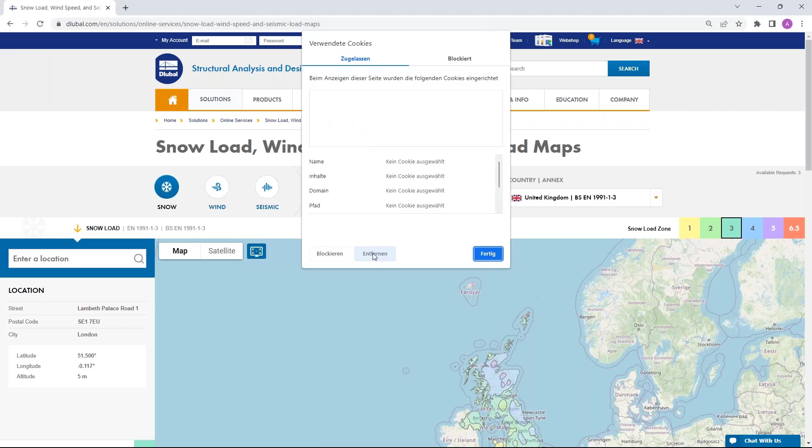Then I start with the first question: the GeoZone tool is not loading, what can I do? Some users of our GeoZone tool had problems with the display of the load maps. You can find under solutions the snow load, wind speed, and seismic load maps. It works for me, but if you have problems, you can click, for example in Google Chrome, on that lock icon left above. Click on cookies and delete all cookies. It can be that you have outdated cookies or unnecessary cookies activated. If you refresh the page, this dialog appears, and you need to allow the cookies, at least the necessary cookies. If you do that, everything should be fine again. That was the first question.

Then we turn to the program and the second question. Can I specify in the combination wizard that load cases from different action categories are mutually exclusive? A relationship between load cases describes rules according to which certain load cases must be considered in the load combination. This way you can define load cases that either always occur together or are mutually exclusive.

In this example, I've got different load cases: self-weight, snow, wind, and a man load. To introduce you to that function, I would like to not combine load case number 3 and load case number 4 - if there is full wind, nobody should be on the roof. How to do that? I open with a right click in the navigator data the load cases and combinations.

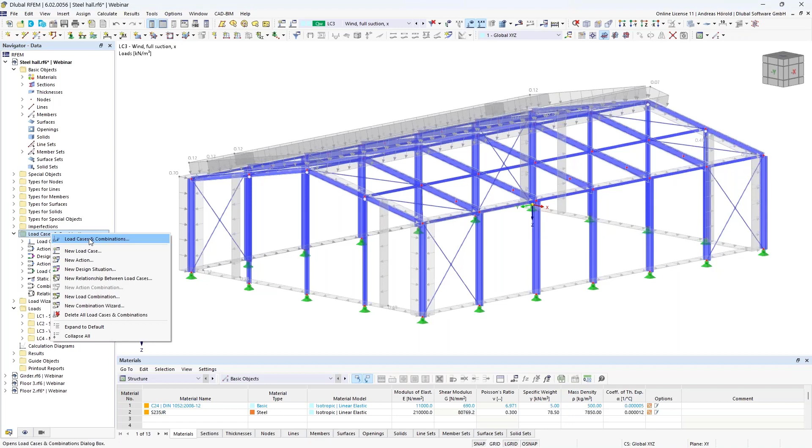At the moment, the combination wizard is activated, and I have 13 load combinations. You can see load case 3 and load case 4 are combined in the load combinations. When I turn to design situations, you can check here: consider inclusive, exclusive load cases. You can create a new relationship: inclusive load cases and exclusive load cases.

That's the dialog for the inclusive load cases. If you click on it, the edit button appears and you can select different load cases. Here you can combine or select load cases that combine only with those load cases, for example the other load case. I think that makes no sense.

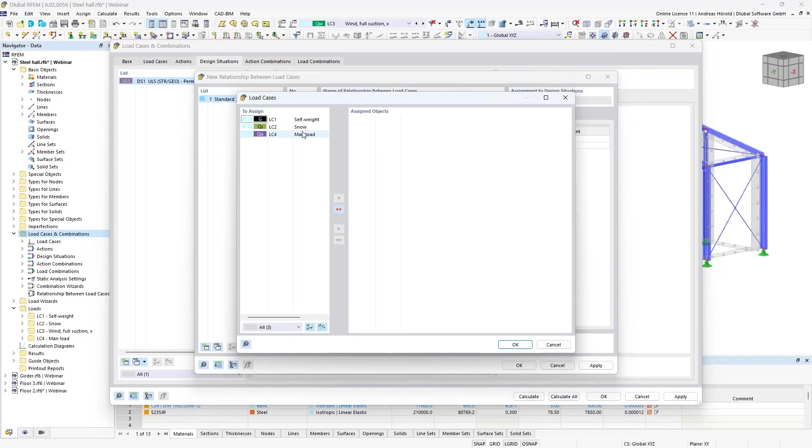We'll use an example that makes sense with exclusive load cases - that's the opposite function of inclusive load cases. You can select here or go in the table and click on the edit button. You can select the wind load case, and we don't want to combine the man load case with wind. Okay, we can apply that.

Let's take a look at the load combinations now. We have only 8 combinations, and load case 3 and load case 4 are not combined anymore.

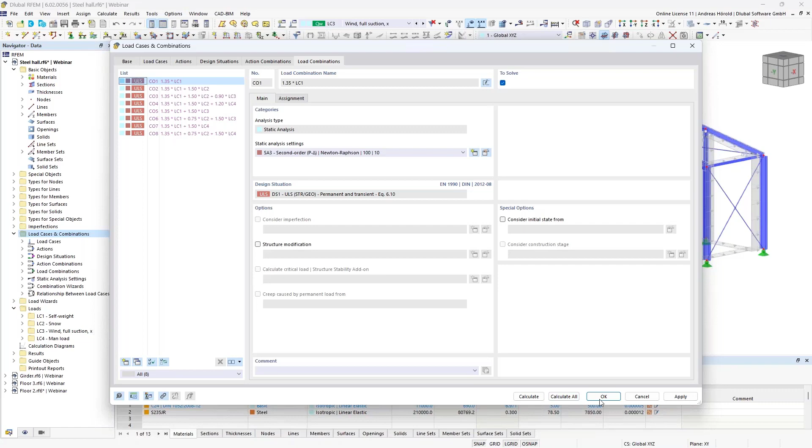Okay, I can leave the dialog and close that model. And we turn to the next question.

That's the right example. The question is: I'm trying to design a laterally supported member, but unfortunately the results I get are completely implausible. What could be the cause of this?

Imagine we want to define lateral supports in the third points here. That's a 15-meter long beam, and after 5 meters and after 10 meters, in the third points, we would like to define such supports.

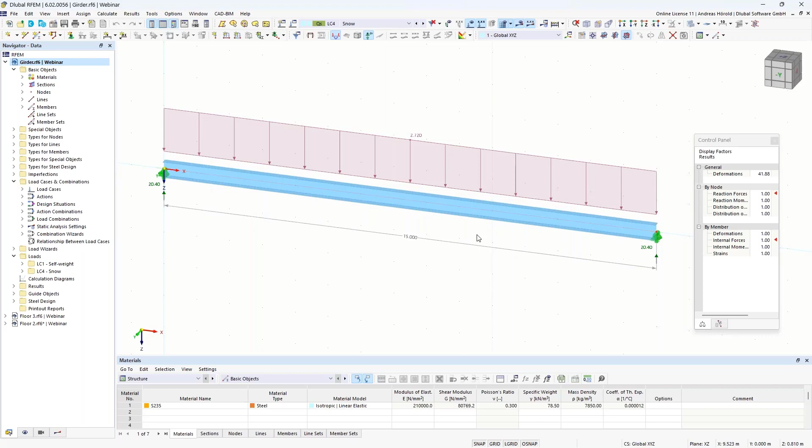How to do that? I double click on the beam. Then the design properties are checked here for the steel design. I turn to the design types, and in the dialog for effective lengths, I create new effective lengths.

Under nodal supports and effective lengths, I can activate intermediate nodes and insert rows. I insert 2 rows and define fixed in Y direction, in the direction of the weak axis.

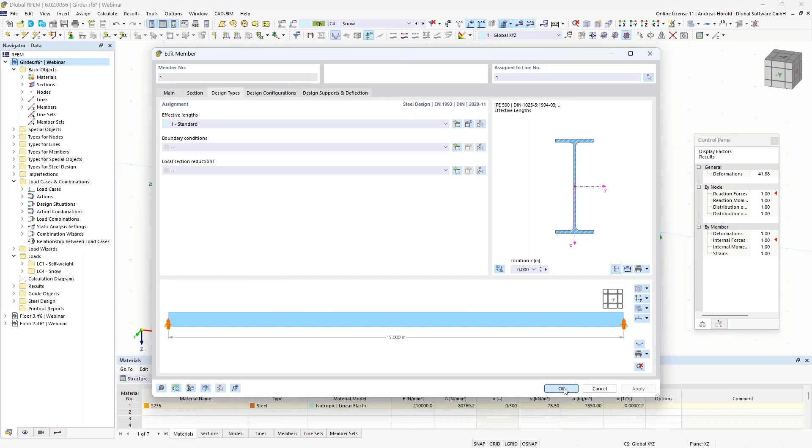Let's run the steel design. As you can see, it's overloaded, and you can see on the mode shape that the girder isn't supported in the third points.

It's not really a mistake, but the program needs nodes in the third points. If I click on it again and go to the design types, maybe you saw it already: there are no node numbers here, and that's the reason why it doesn't work.

So let's define these nodes. I select the beam, or right click on the beam, then under members I find the function divide members.

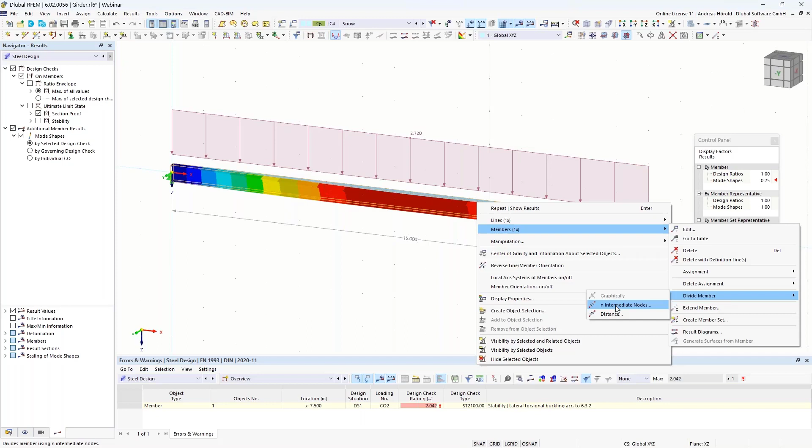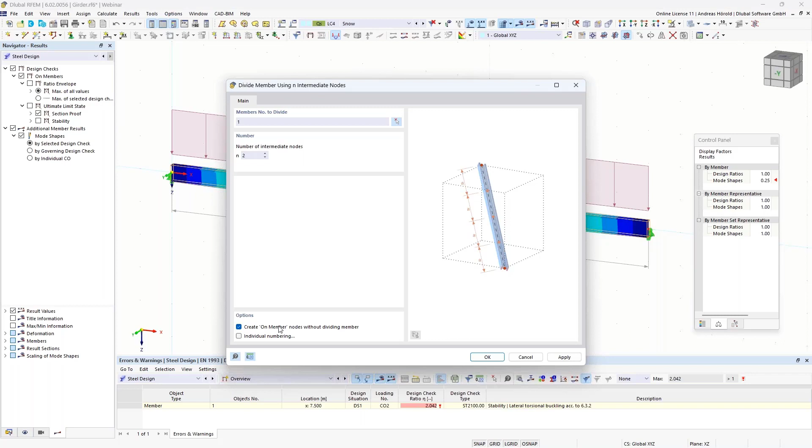I click on n intermediate nodes, define 2 intermediate nodes, and check the option create on member nodes without dividing member. I could also uncheck this, then the member would be divided, but then you'd have to create a set of members. I'd like to avoid that, but it would also be possible.

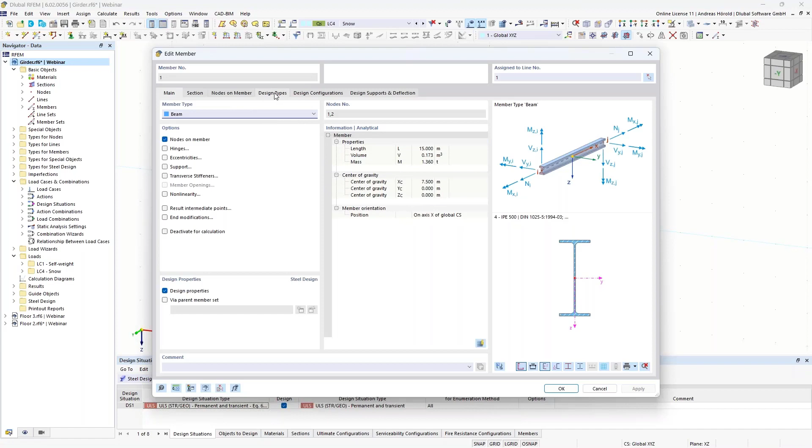Okay, so two nodes are created in the third points, and the member isn't divided. I double click on it, go again to the design types, and use the edit button.

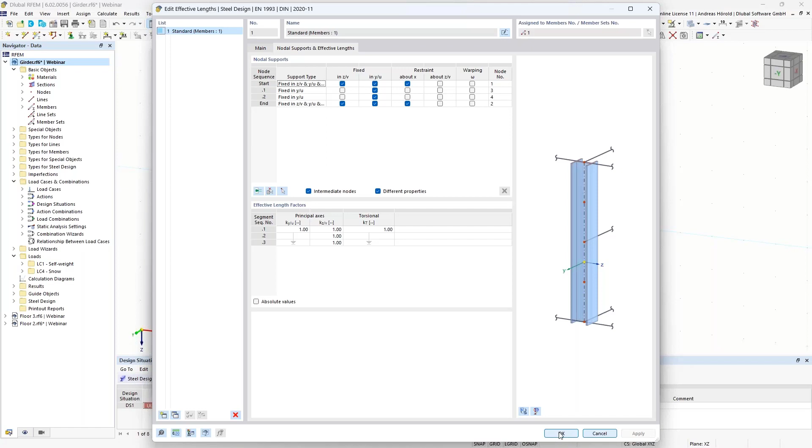Then you can see the program detects the nodes automatically and assigns the fixed function in Y direction to the nodes. And in the preview graphic, you can see the lateral supports.

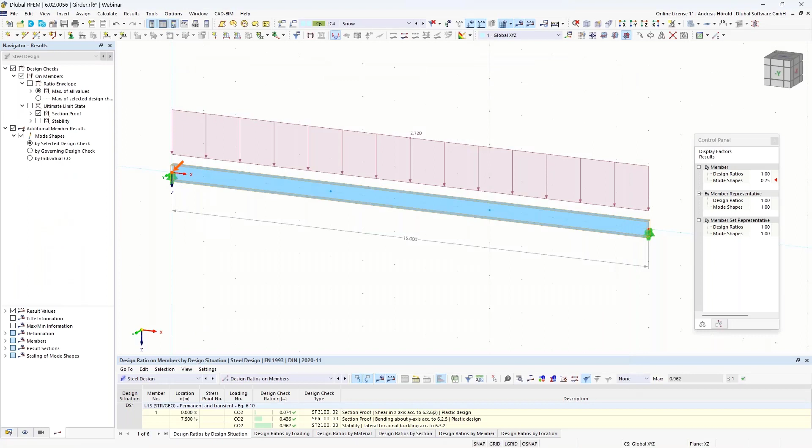Let's run the steel design again. So now you can see the ratios are under 1.

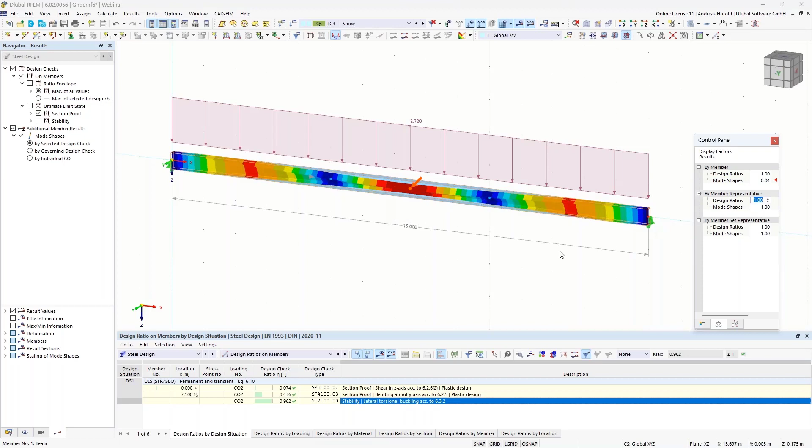And if I click on stability design, you can see the mode shape. I edit the factor, and then you can see that it is supported in the third points: a completely different mode shape and a different stability design.

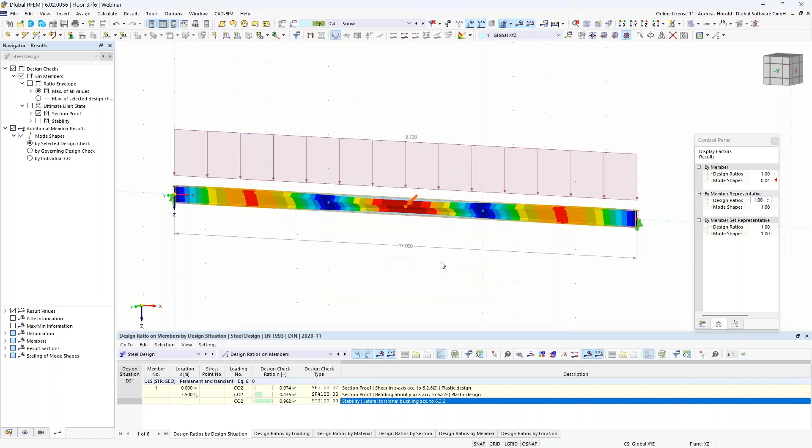Okay, then we turn to the next models. The question is from last month: can I transfer the support forces from one model to another model as loads?

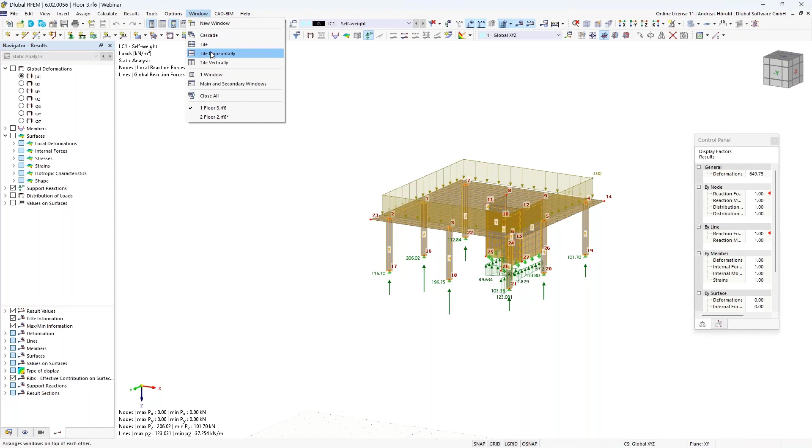Let me prepare the window. I tile it horizontally. I've created two models: the model floor 3, and under floor 3 is floor 2, another model.

You could design it in one model, but sometimes it's necessary or you'd like to design in different models. It's now possible to transfer or apply the support reaction from that model as a load on this model. I'll explain it using two examples.

You can see here a support reaction of 206 kilonewton, and here a nodal load of 206. Here 101, and this nodal load is missing on node number 17. We have 116 kilonewton as support reaction there, and we would like to apply that at that node.

How to do that? I create a new load, a new nodal load, left above. Then I check 'from support reaction'. A new dialog is available now.

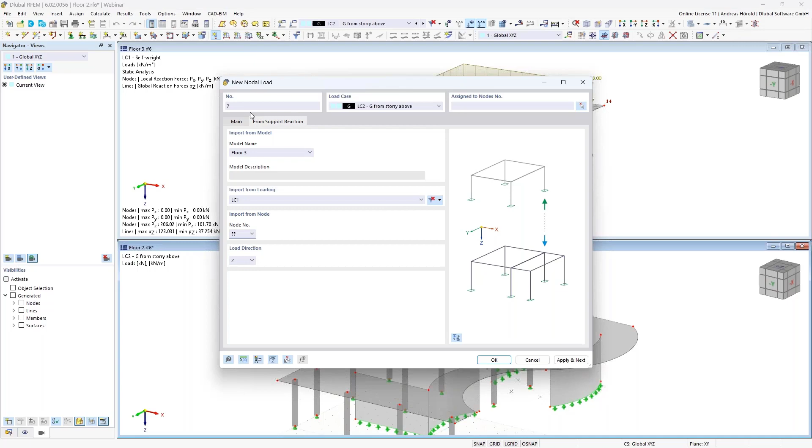So, floor 3, that load case, node number. That's why I displayed the nodal numbers. We have to select nodal number 17.

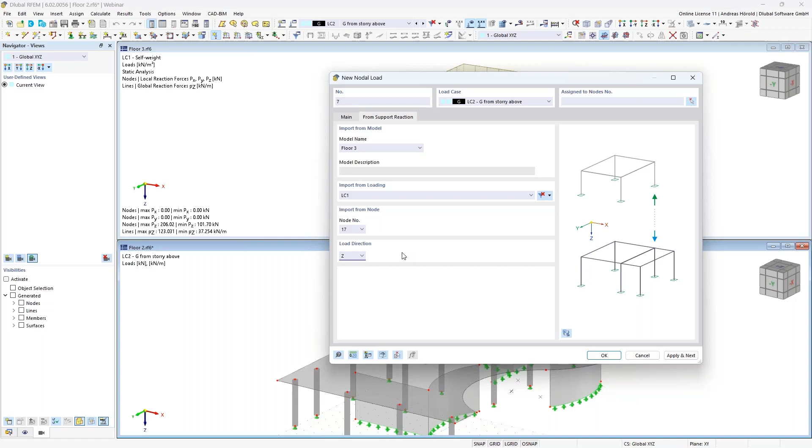And the load should be in Z direction. Also, transfer of horizontal load is possible, as you can see. So, I select the node.

And why are there still question marks visible? Because we have to calculate the model. But before we do that, I would like to assign a line load.

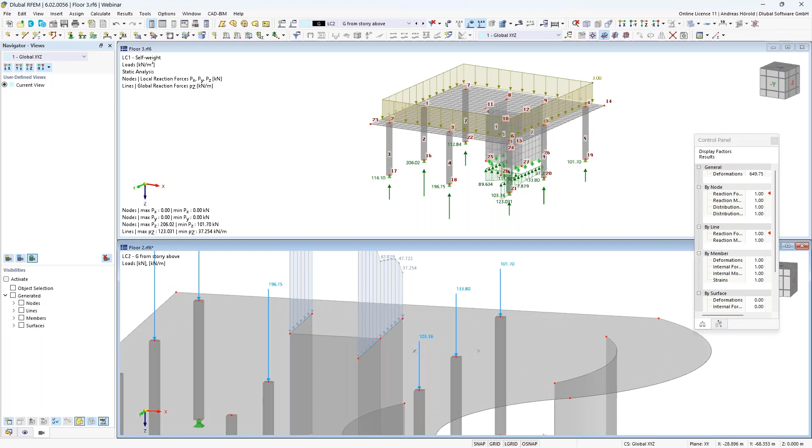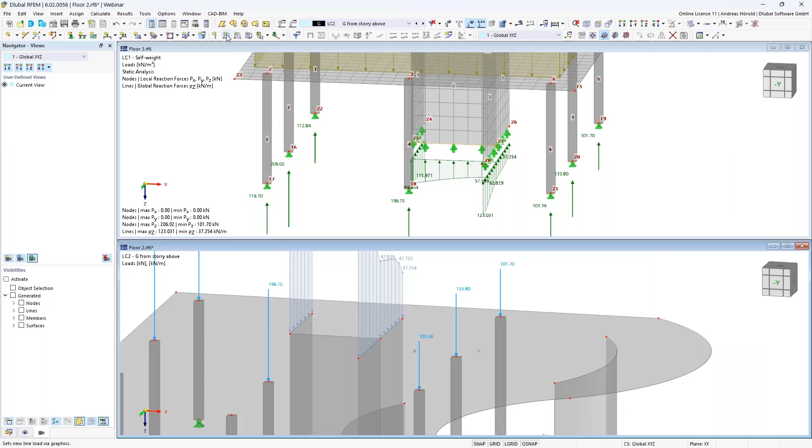So on that line, I can rotate this model here. This support reaction from line number 22 should act as a line load on line number 2. So we create a new line load.

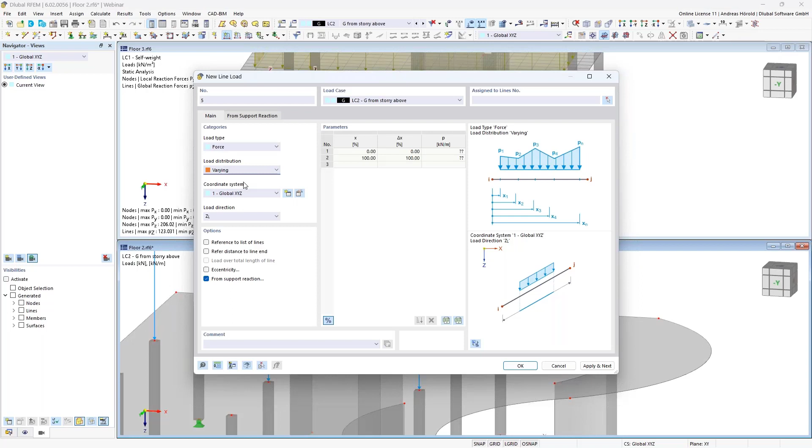We activate the function for support reaction. I can choose a load distribution with varying or uniform. I leave it varying. Then in the dialog for support reaction, I have to choose the model Floor 3, load case number 1, line number 22, and the load should act in the Z direction.

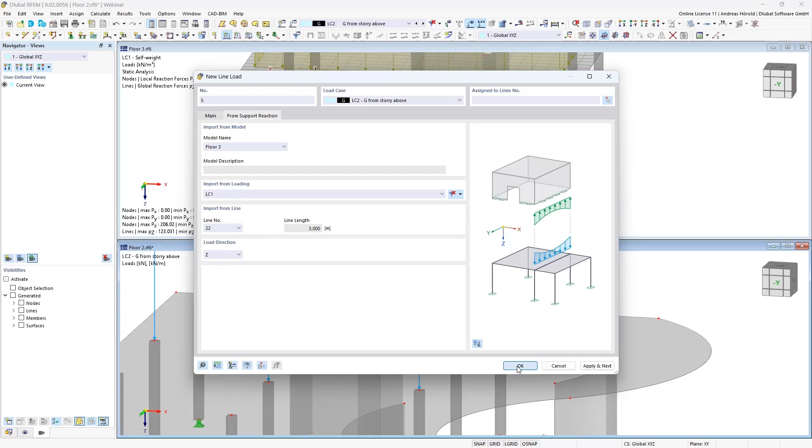I have to select the line. That's all. And now we have to calculate all.

This is the first expansion stage of the function, and it has been released with the current version. So as you can see...

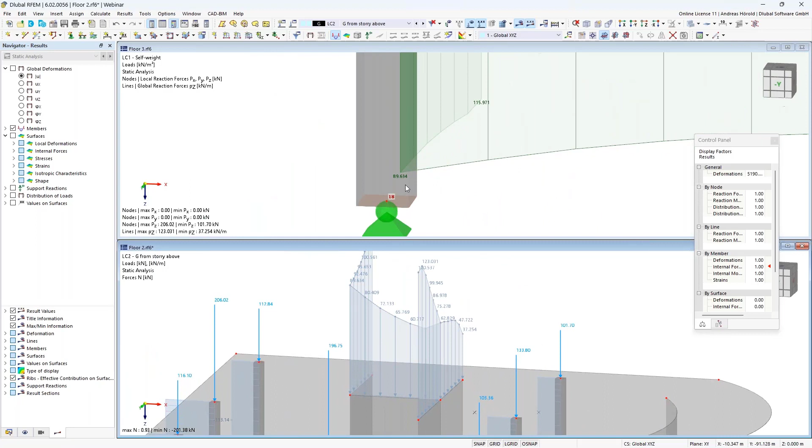Here are 89 kilonewton per meter, and here also 89 kilonewton per meter as load. Then the nodal support reaction was 116 and 116 here at that node. Okay, that should be all.

Do I forget to mention anything? As I mentioned, the feature is in the first stage, and there will be another variant soon in which several elements and several load cases can be linked together at the same time.

Just try it, also with the downloaded models - you can download the models from our website. I will show at the end of the webinar where you can find them.

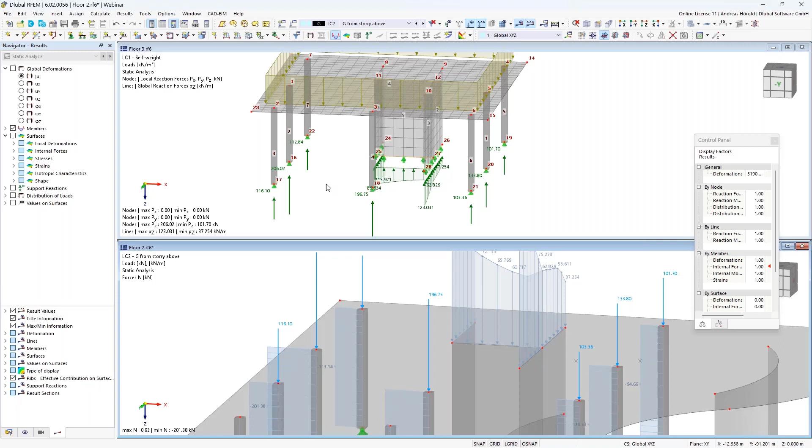The most important thing is that the two models, or more models, are in the same Dlubal Center folder. Then as a first step, you should use the Save As function, and then all should be linked.

Okay, then I close that model and turn to the next question: is there a way to assign custom keyboard shortcuts to certain commands, such as copy to clipboard and so on?

With RFEM 6 and RSTAB 9, you can assign hotkeys to a variety of commands. This way, frequently used commands can be executed easily and quickly with a previously assigned key combination. You can also do that for the mouse - if it has buttons besides the left, right, and middle buttons, you can assign a shortcut to these other keys.

I would like to show the shortcut for the keyboard. You can do a right click on the toolbar, then you can see the Customize Menus and Toolbars function, or under Options you can also find this function.

If you open it, there are already shortcuts defined, and I would like to show it with an example. We would like to create a shortcut for Print Graphics to PDF. I double click on it, and then press Ctrl and D, then Set.

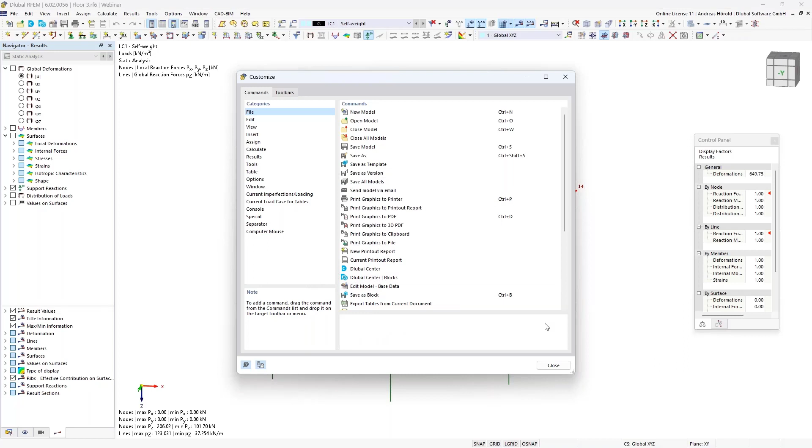And I leave the dialog. If I click Ctrl and D, then the PDF print should open. And if I click OK, then I can print the graphic.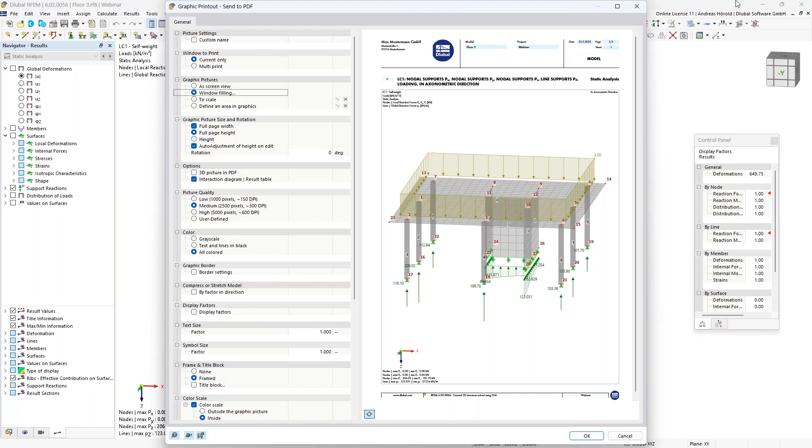Then we turn to the next question. I have to open another model. The question is: are the manufacturer databases for CLT also included in the multi-layer surface add-on?

I would like to show that on a model from a previous webinar. Under Thicknesses, layers are defined. Let me create a new thickness to show you the library.

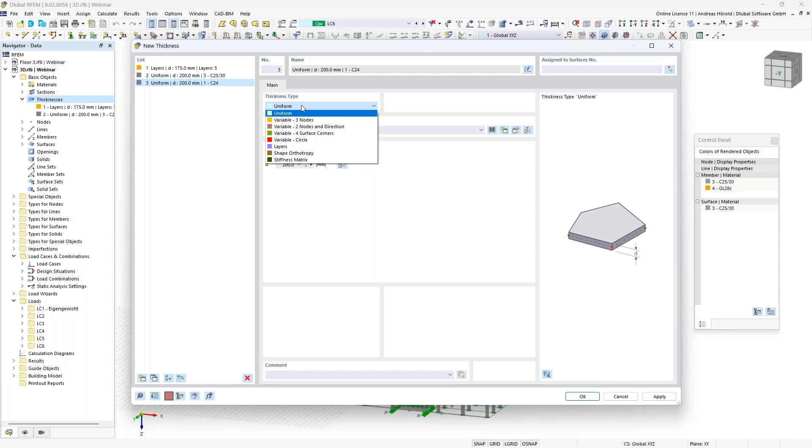So I have to define a material and then - no, that's not right - I have to define or assign a thickness type, layers. That's better. Then I click on layers, and you can find the library here, the book button.

Click on it and you can see all the manufacturers here: Binderholz, KLH, and so on. Now I can select any layer combination here, and it will be imported.

That's all to that question. We extend this library from time to time, continuously.

I think this week another manufacturer will be integrated.

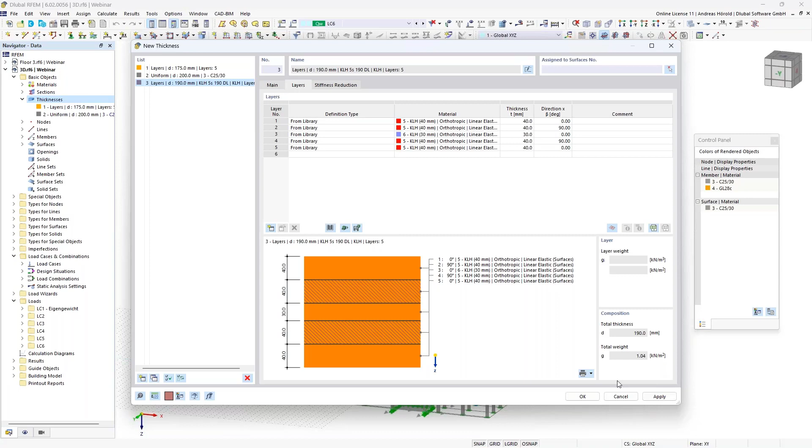Okay, then we turn to the last question for today: can I import models from Revit 2023?

Yes, the interface to Revit 2023 has recently been released. To use the interface in Revit, the add-on for export or import must first be installed.

I can show you where to find it in your Explorer, under Windows, Program Files, Dlubal, RFEM, the current version 6.02, Tools, and Revit Add-in. You can find the setup exe, double click on it, and install the interface tool.

I prepared that model to show you some things. If you have installed the interface, there is the RFEM6 Work in Progress dialog here. Then you can find the Export Import button, Dlubal Parameters, and the conversion tables.

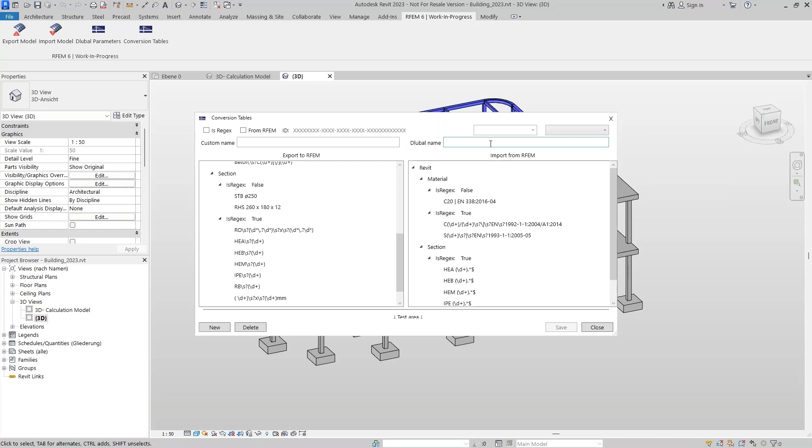There are predefined conversion tables for the materials and the cross sections, but you can create new definitions. You have to enter the name in Revit for the cross section or for the material here, and the name in RFEM here.

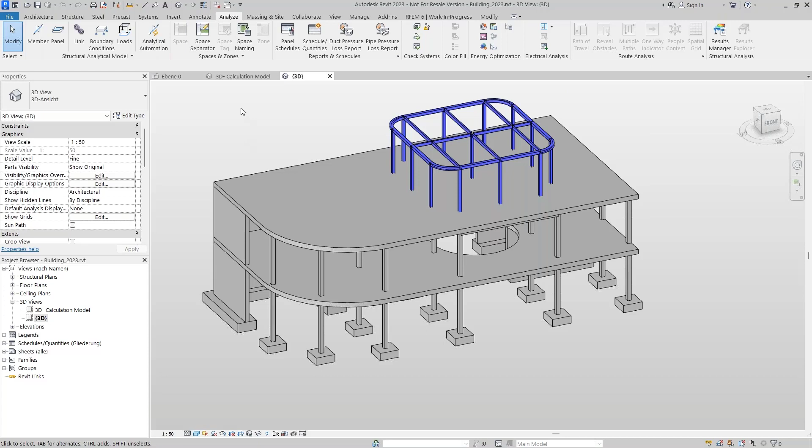Before the export, we recommend creating an analytical model from the physical model. That's the physical model. If you click on Analyze and Analytical Automation, a calculation model is created, with the definition of the material, the member definition, and so on. Maybe you have to modify something on that calculation model, but that depends on the model in Revit.

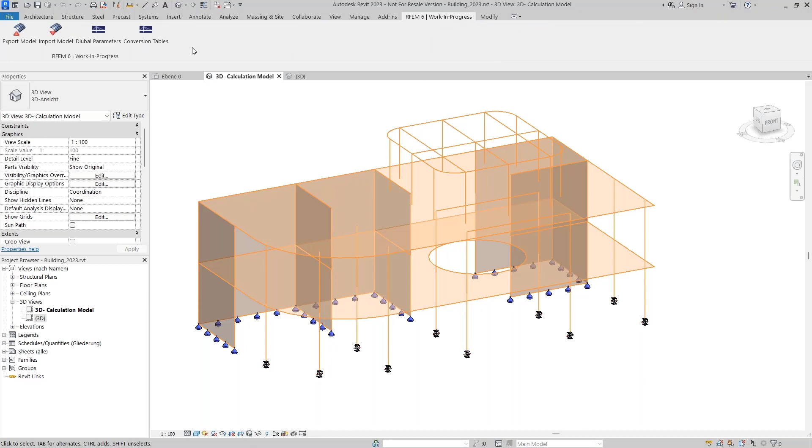So once all parameters are present, nothing stands in the way of performing an export. We have to click on the export model, and you can see you have different options.

That's a similar dialog as in RFEM5. You can define the Z direction, upwards, downwards, create a new structure, override existing structure. You can use the analytical or physical model or both, only selected objects, and so on.

Under structural settings, you can apply different structural data. For example, you can convert isolated foundations to nodal supports, and wall foundations into line supports. Those foundations should be nodal supports in RFEM.

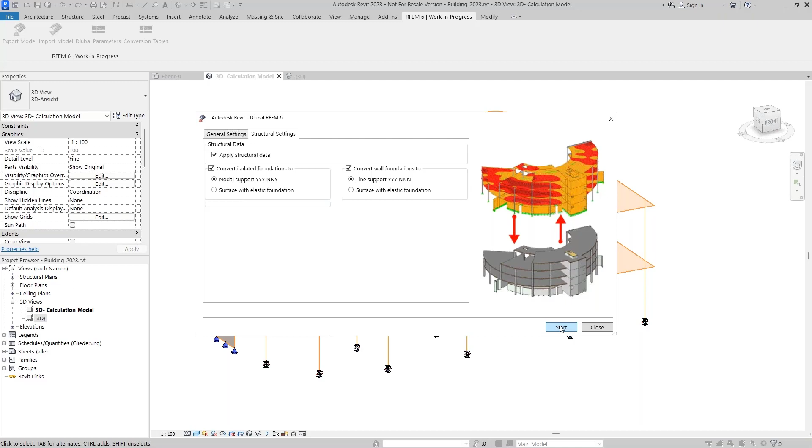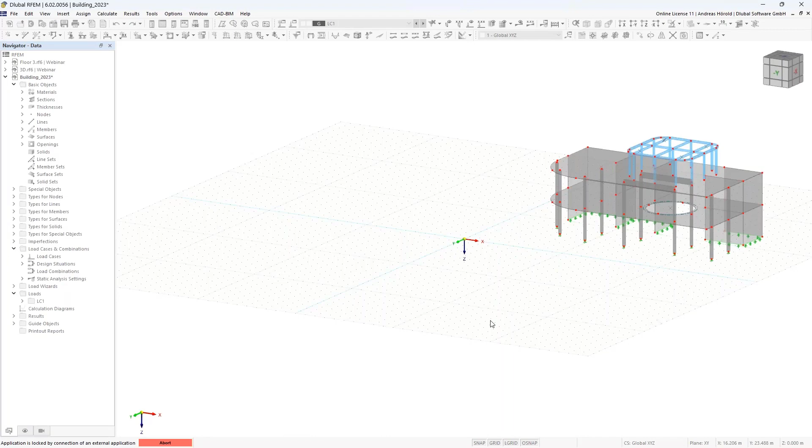Then we can press the start button, and the transfer to RFEM should work. So I open RFEM. It creates a new model, and after some seconds, the model should be transferred.

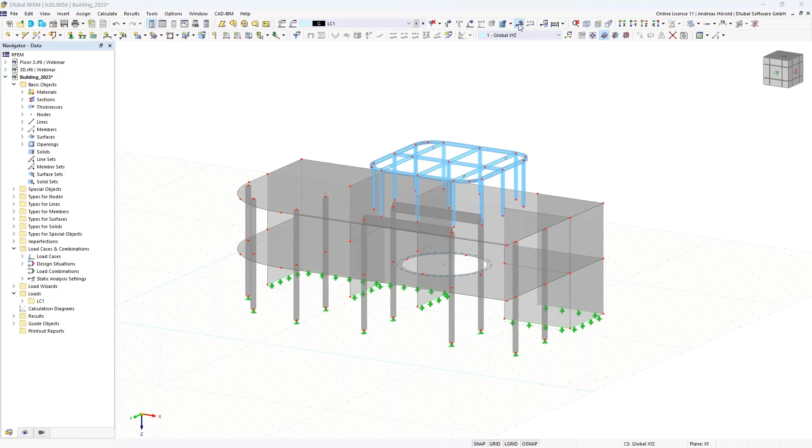Now you can see all the members and surfaces and so on are transferred, also the line supports and the nodal supports. Let's check if we can calculate the self-weight load case. Okay, that works. All was transferred fine.

An important note: if the export fails, it may be because web service has not been activated in RFEM. I can show you where to do that. Under options, you can find the program options, and when you scroll down, you find the web service. This checkbox isn't activated by default.

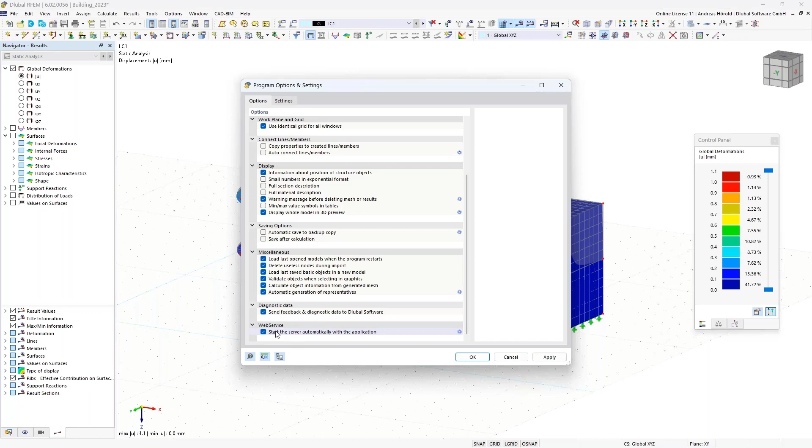Then you have to check this. When you use the Revit interface or the other interfaces, the web service is for free.